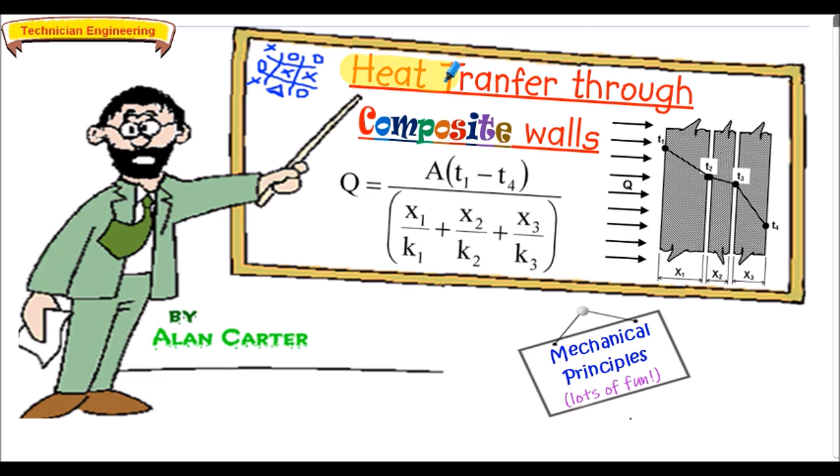Hello and welcome to this presentation related to heat transfer through composite walls. An illustration of a composite wall is shown on the right hand side here of thickness x1, x2 and x3.

In a previous presentation we calculated the heat transfer through a single wall. In this presentation we're going to calculate the heat transfer, symbol Q, using this formula shown here for the composite wall. It is strongly encouraged that you review the previous presentation on heat transfer through a single wall before reviewing this presentation related to heat transfer through composite walls.

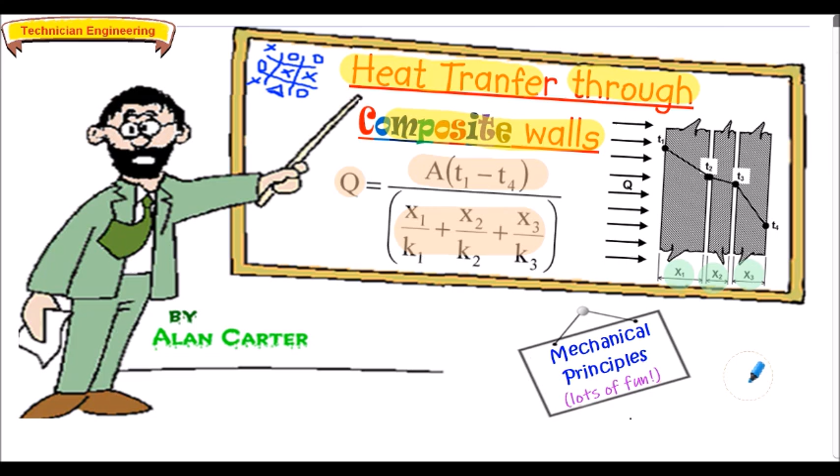Here's a presentation overview. We commence with an introduction outlining the formula used to calculate transfer of heat energy through composite walls. This is the formula shown here.

Then we have example 1b. This shows how to calculate heat transfer Q through a composite wall, having a range of temperature from T1 to T4, shown here on our sketch. And we also show how to calculate the intermediate temperatures, T2 and T3, within the wall, shown here on our sketch.

Next we have exercise 1b, which calculates the heat transfer Q and the intermediate temperatures T2 and T3 through our wall. Then we have some questions for you to undertake.

Question 1b calculates heat transfer Q, as does question 2b. And question 3b calculates the heat transfer per unit area. We use the symbol lowercase q to denote that property. And also how to calculate the thickness x2 of the composite wall.

Full work solutions are shown to the exercise and the questions. The presentation concludes with some further questions for you to attempt at your own pace.

And here are the approximate start times related to the various sections contained within the presentation, to hopefully aid your ease of access through the presentation, but please note these times are generally rounded to the nearest minute.

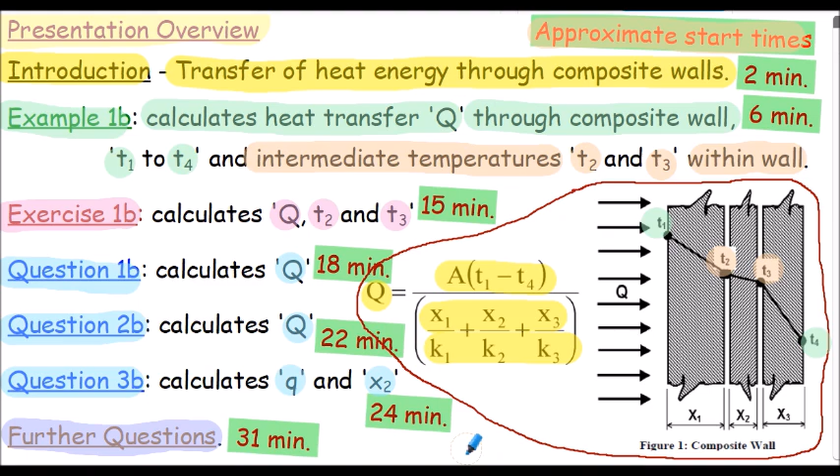So for equilibrium conditions, the transfer of heat energy through each section of a composite wall is assumed to be the same. So in other words, in our diagram, the heat transfer through section 1, Q1, would be the same value as the heat transfer through section 2, Q2, and the same value as the heat transfer through section 3, Q3. That's the assumption made in the calculations.

Thus, when considering the heat transfer through composite walls, shown in figure 1, the formula for Q is as stated below. The heat transfer Q is equal to the area of the wall multiplied by the difference in temperature between T1, shown here, and T4, shown here. And that's all divided by, in this bracket, thickness x1 divided by the thermal conductivity coefficient of material 1, labelled K1, added to x2 divided by K2, added to x3 divided by K3.

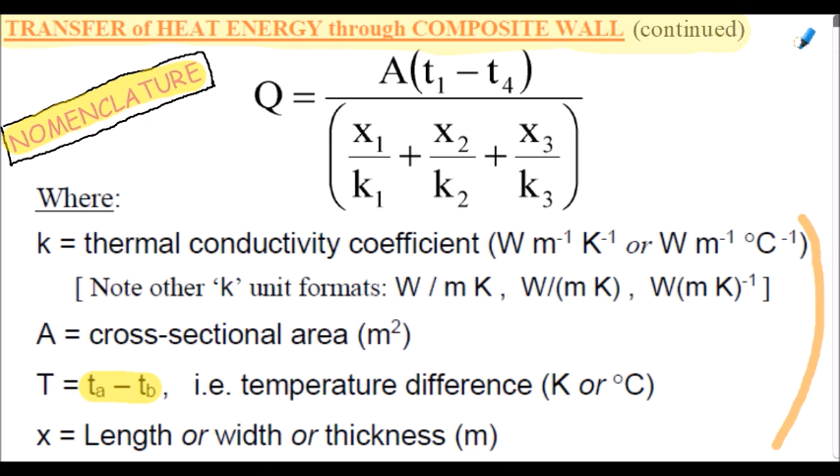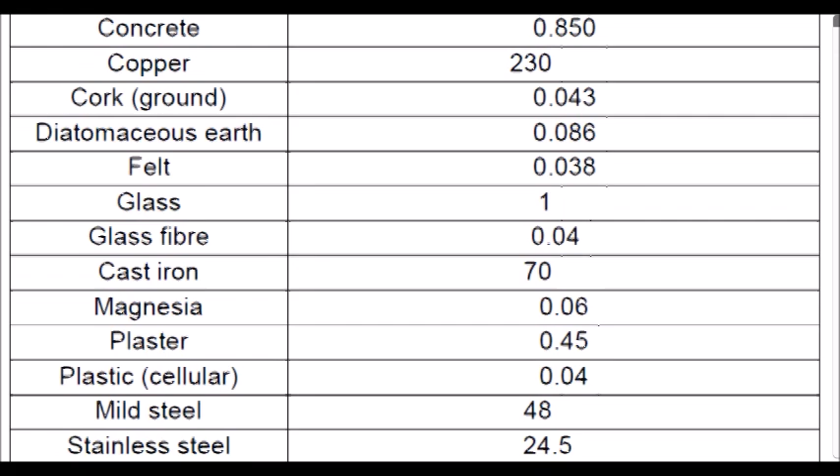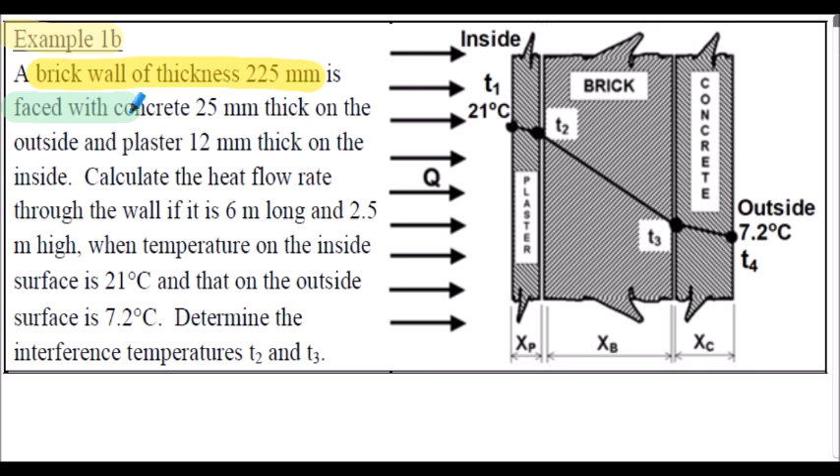Let's consider example 1b. A brick wall of thickness 225 millimeters is faced with concrete 25 millimeters thick on the outside and plaster 12 millimeters thick on the inside. Here's our brick wall of thickness XB, the concrete on the outside of thickness XC, and the plaster on the inside of thickness XP.

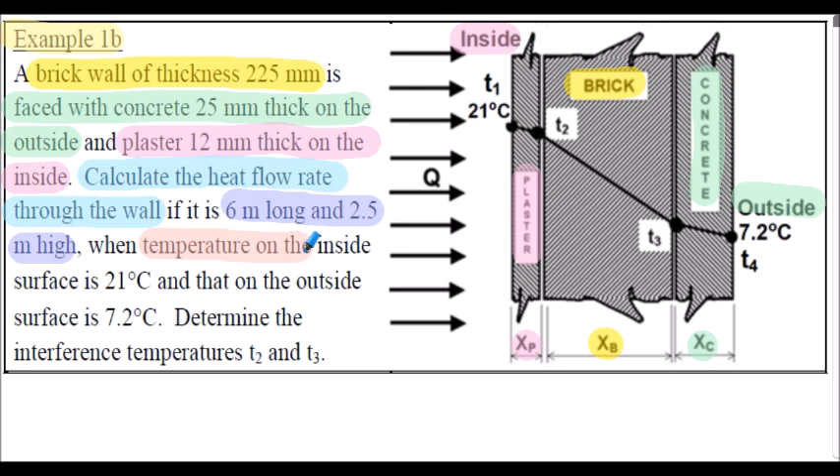We're asked to calculate the heat flow rate through the wall if it is 6 meters long and 2.5 meters high. The temperature on the inside surface is 21 degrees C, labelled T1. The temperature on the outside surface is 7.2 degrees C, labelled T4.

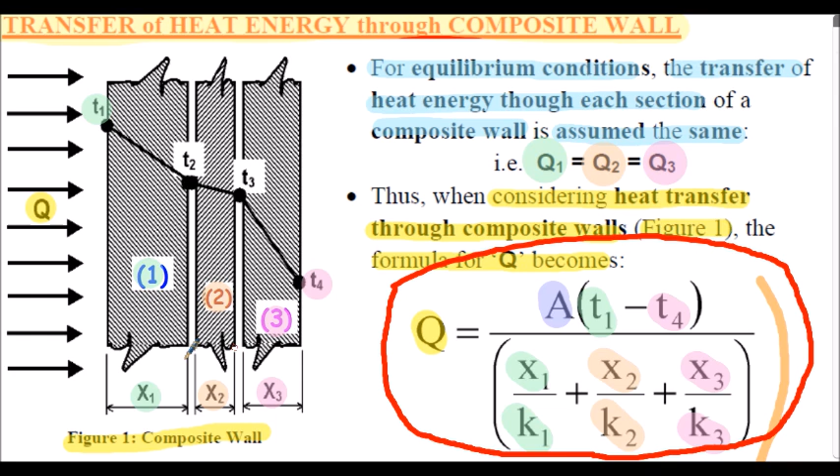We've got to determine the intermediate or interface temperatures T2 and T3. Initially we'll use this equation to calculate heat transfer Q for the 3-section wall as shown in the diagram, then rearrange this equation for the change in temperature, in this case T1 minus T2, to calculate the various intermediate temperatures on the wall.

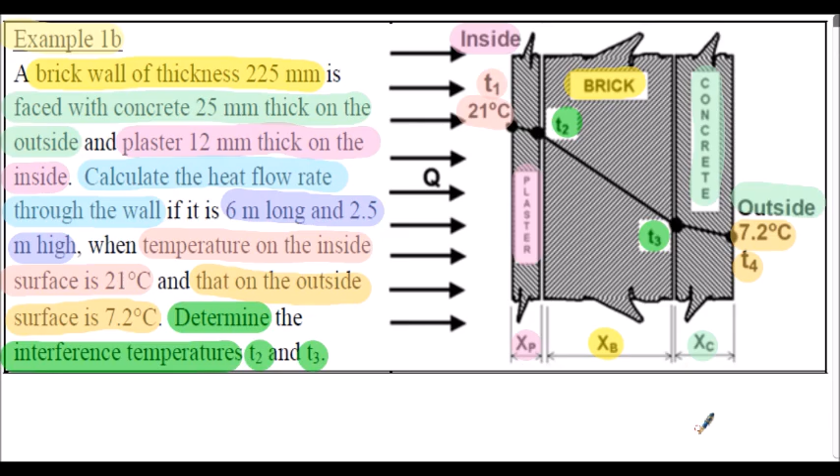I'll show you now the full worked solution for example 1b. Here's the beginning of the solution.

First, as always, we need to extract information from the question, and also from table 1 in our notes, shown on page 6, because we need to find the thermal coefficients for the plaster, the brick and the concrete.

Extracting information from the question: the thickness of the plaster XP is 12 millimeters, stated in meters as 0.012 meters since we'll use meters throughout. The thickness of the brick is 0.225 meters, and the thickness of the concrete is 0.025 meters.

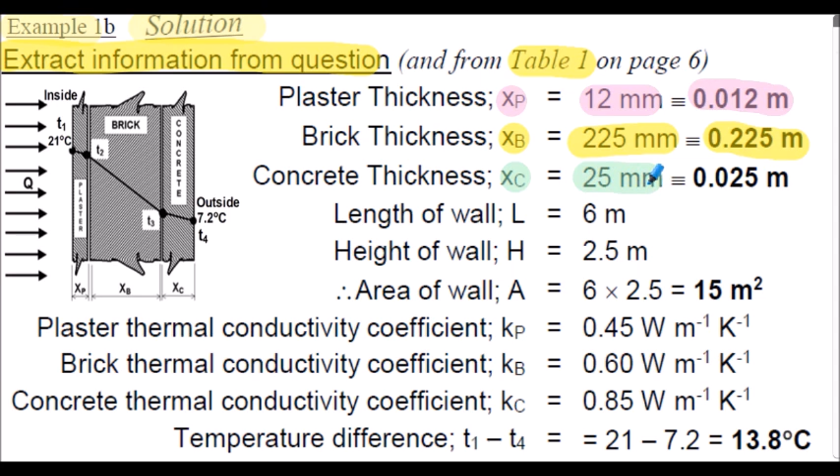In our diagram here, here's the plaster section XP, the brick section XB, and the concrete section XC. We're given the length and height of the wall in meters, so we can calculate the area of the wall, and it's 15 meters squared.

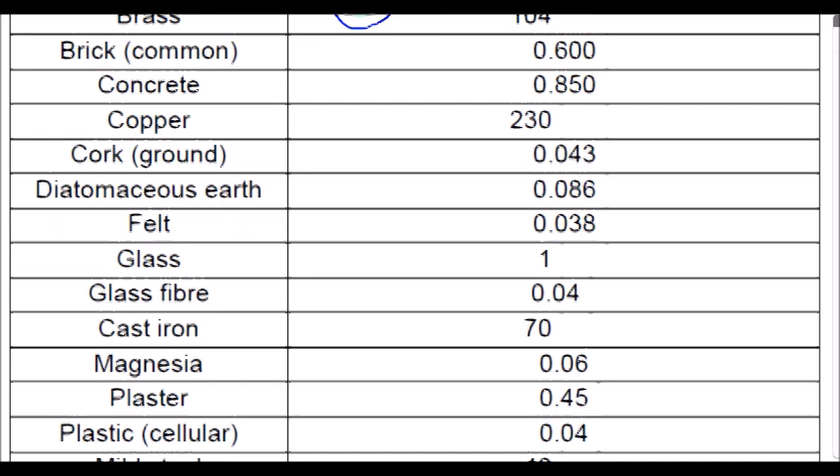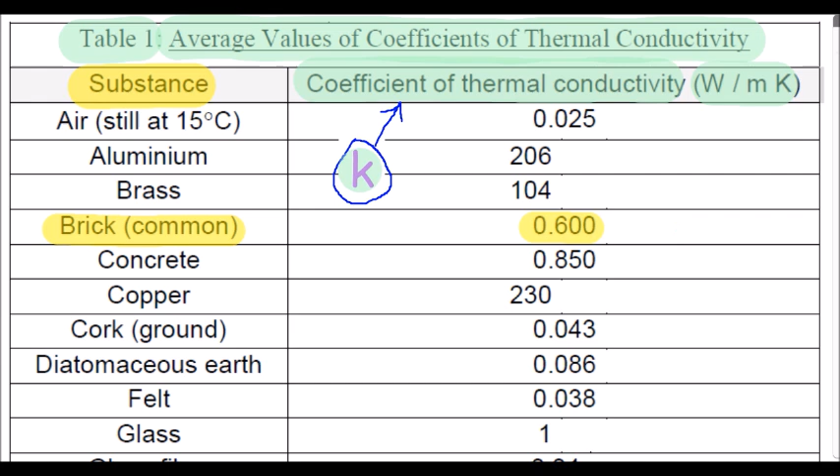Next we need the coefficient of thermal conductivity for the plaster Kp, that's 0.45 watts per meter per Kelvin, from table 1. The K for the brick is 0.6 watts per meter Kelvin, again from our table. And the K for the concrete is 0.85 watts per meter per Kelvin, shown in table 1.

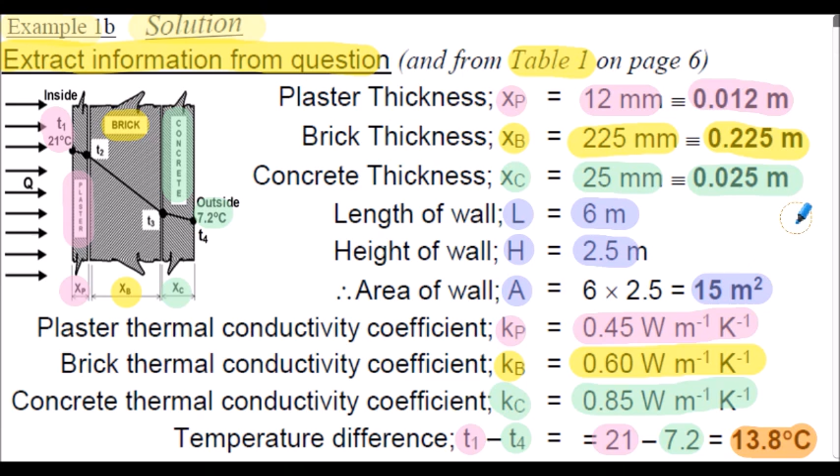The temperature difference is T1 minus T4. T1 is 21 degrees, the inside temperature, and T4 is 7.2 degrees C, the outside temperature. So our change in temperature is 13.8 degrees C. That's the information extracted from the question and from table 1.

Example 1b, solution continued. Firstly, let's calculate the rate of heat transfer, or heat flow rate Q, showing the formula on the left hand side. We're now just going to insert the various values, shown on the top right hand side of our slide for convenience, literally inserting them into the formula.

Our area is 15 meters squared. Temperature T1 minus T4 is 13.8 degrees C. XP upon KP, shown here. Next, XB divided by KB, shown here, inserted into our equation. And finally XC divided by KC, inserted into the equation. Evaluating, Q is 480 watts.

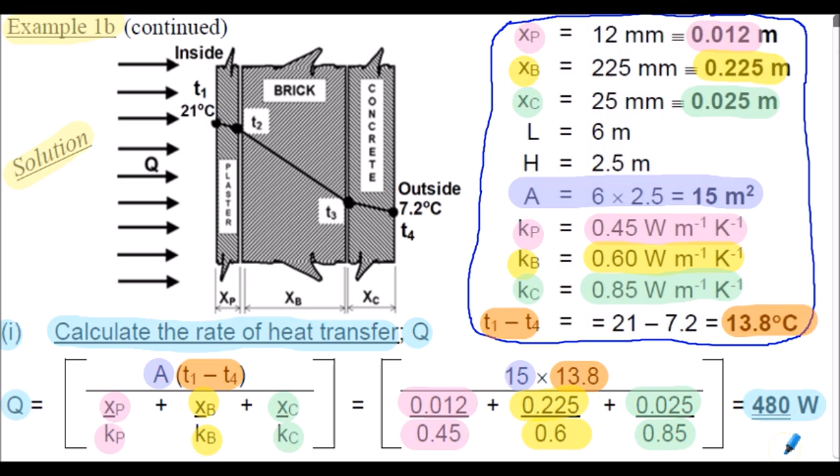We assume now that value of Q is constant throughout the three sections of the composite wall. That's the solution to the first part of example 1b.

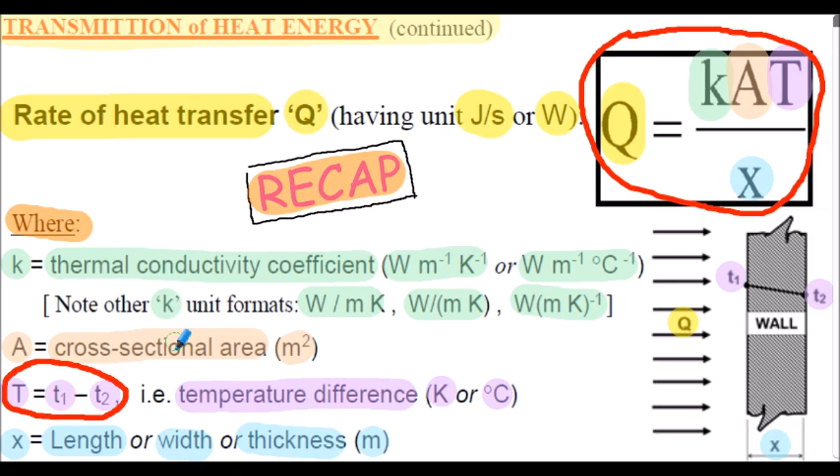Example 1b, solution continued. Now we need to determine the intermediate temperature T2 within our composite wall. This is part 2. To determine T2, we use the equation from the previous presentation for a single section wall: Q equals K A T divided by X, where T is the temperature difference. So Q equals K A capital T, which is T1 minus T2, all divided by XP.

We now need to transpose the equation for T2. First I divide both sides by KPA, then add T2 to both sides, and subtract QXP divided by KPA from both sides. So my transposed formula is T2 equals T1 minus Q multiplied by XP divided by KPA.

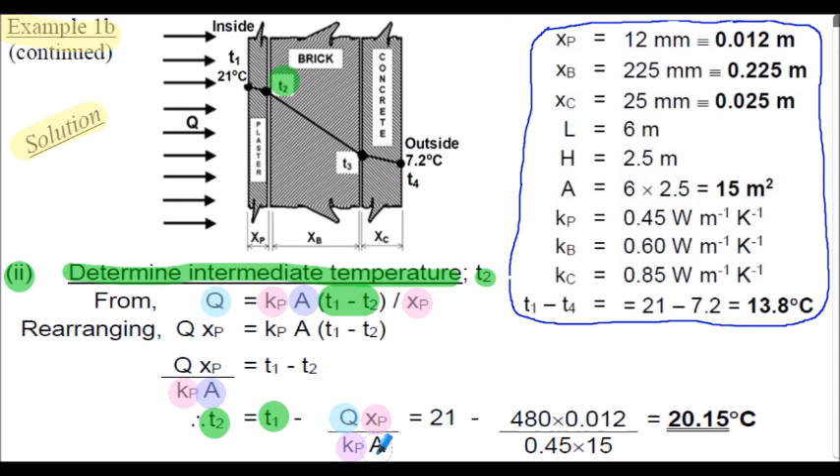All I'm going to do now is insert the values, listed above for convenience. Evaluating, T2 is 20.15 degrees C. We're now going to apply the same approach to calculate intermediate temperature T3.

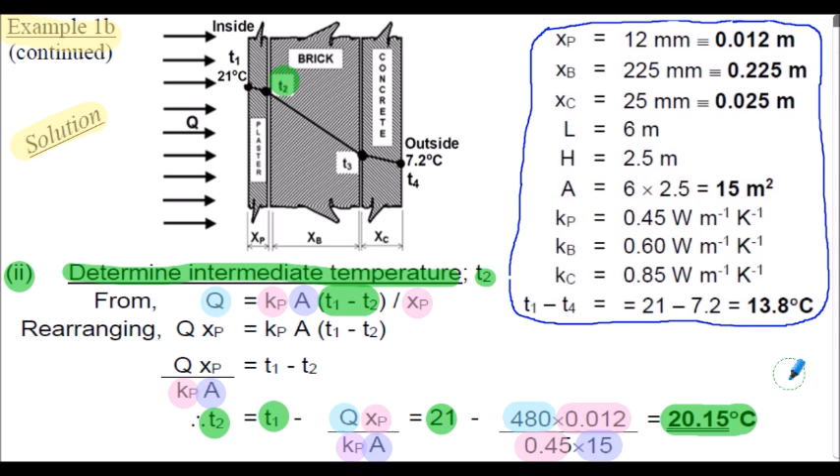Example 1b, solution continued. In part 3 we have to determine the intermediate temperature T3. It's a very similar approach to calculating T2. The only difference now in our heat transfer formula Q is that we use the K value for brick and the XB value for brick, since that's the section we're considering, and the temperature difference is now T2 minus T3.

Using the same transposition as before, we can evaluate the formula for T3: T2 minus Q multiplied by XB divided by KB multiplied by A. Inserting the values, the intermediate temperature T3 is 8.15 degrees C.

Example 1b, solution continued. I've included part 4 here for reference. I'm determining the outside temperature, T4. We know it's 7.2, but this is basically a check calculation on my previous calculations. I've taken the equation for Q, but this time with the change in temperature T3 minus T4, since I'm considering the concrete section, so my K and X values will be for concrete this time. Area remains the same, of course.

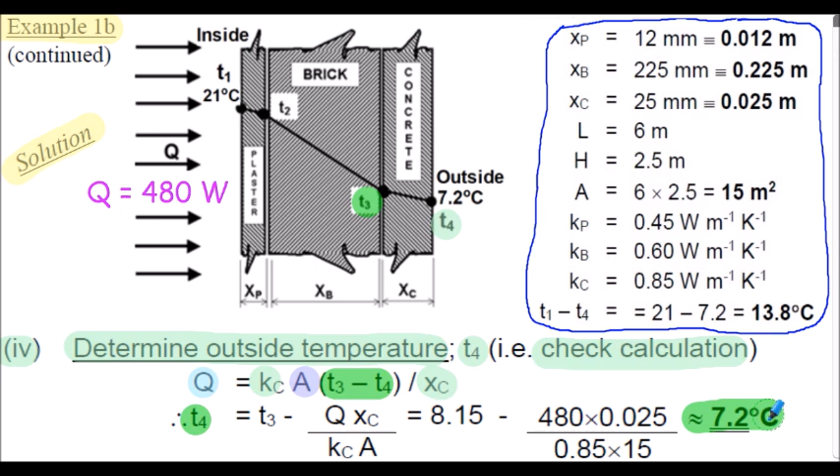I've transposed the above equation for T4 and inserted the values, and it works out to one decimal place to be 7.2 degrees C. So that was correct - just a check calculation added for reference.

Here's exercise 1b. The solution is very similar to that of example 1b. I'm going to very briefly outline the question. I will show you a solution, but I'll let you review the solution at your own pace.

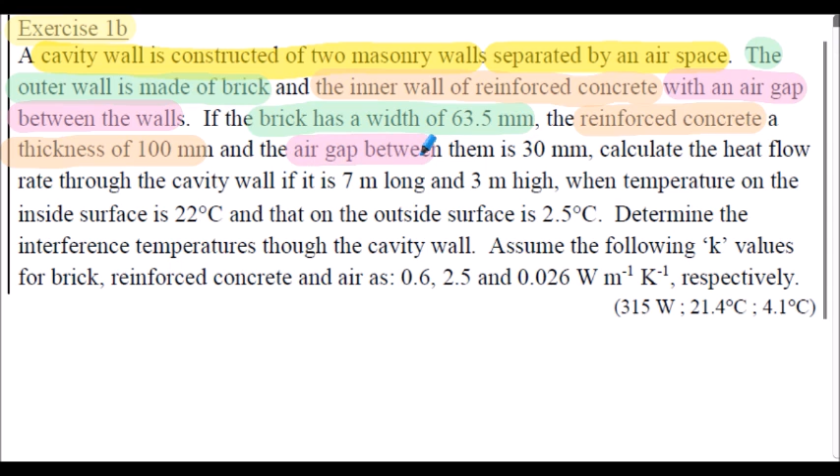A cavity wall is constructed of two masonry walls, this time separated by an airspace. The outer wall is made from brick, the inner wall is made from reinforced concrete, with an air gap between the walls. The brick has a width of 63.5 millimeters, the reinforced concrete a thickness of 100 millimeters, and the air gap between them is 30 millimeters. We've got to calculate the heat flow rate, Q, through the cavity wall if the wall is 7 meters long and 3 meters high.

We're given that the temperature of the inside surface of the reinforced concrete wall is 22 degrees C and the outer surface of the outside brick wall is 2.5 degrees C. We're asked to determine the interface or intermediate temperatures through the cavity wall, and we're given the K values for brick, reinforced concrete, and air in watts per meter per Kelvin. The answer for heat flow is shown here, and for the intermediate temperatures T2 and T3 shown here.

I'd encourage you to stop the presentation and attempt exercise 1B. It's a very similar solution to that of example 1B, so you can use example 1B as your template, but I will outline the full solution on the following slides.

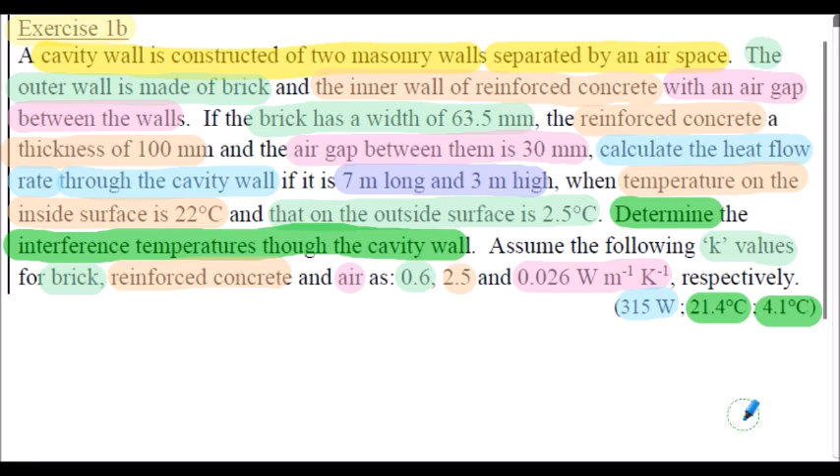So exercise 1B, commencement of the solution. As always, the first thing to do is to extract the information from the question. I'll let you review this slide at your own pace. Notice the temperature difference here, T1 minus T4, is 19.5 degrees C.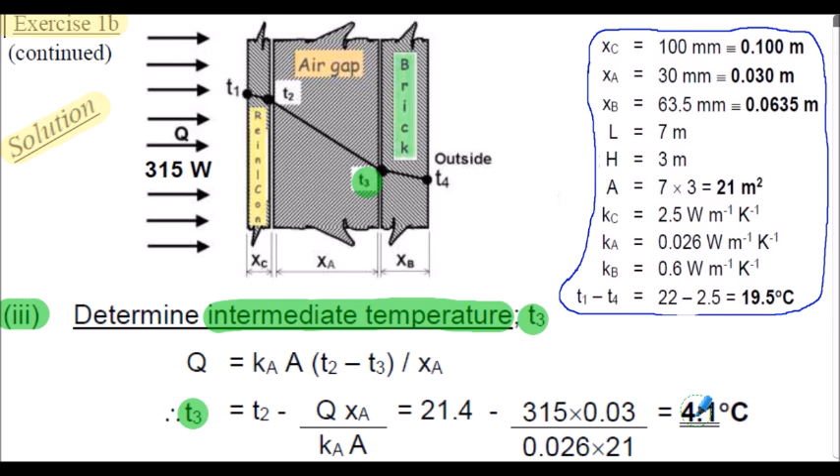Exercise 1B, solution continued. I have included a step 4, which again is a check. I'm calculating essentially the outside temperature T4. We know from the question it's 2.5 degrees C. So when I evaluate T4, it's approximately 2.5 degrees C. So I consider my calculations to be correct within the accuracy required for this type of problem.

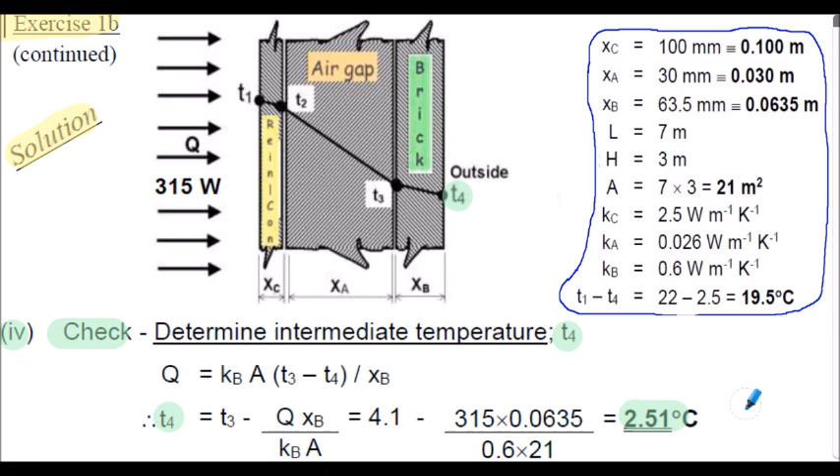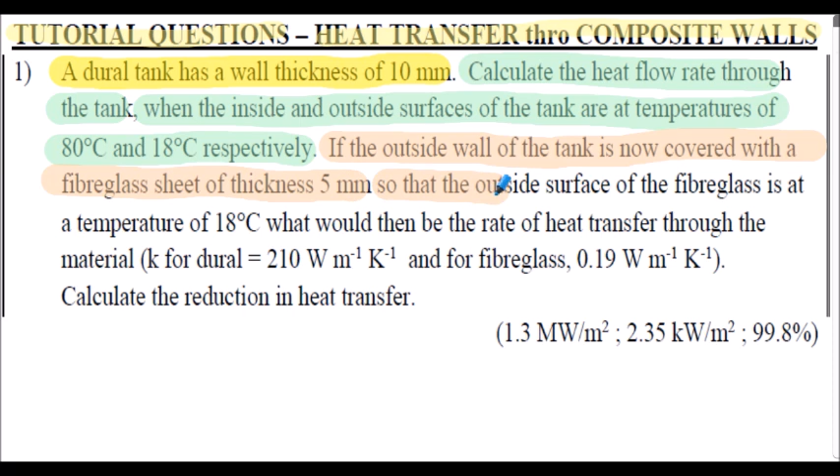Let's now consider some tutorial questions related to heat transfer through composite walls. Question 1: A Dural tank has a wall thickness of 10 millimeters. We're asked to calculate the heat flow rate through the tank when the inside and outside surfaces of the tank are at temperatures of 80 degrees C and 18 degrees C respectively. If the outside wall of the tank is now covered with a fiberglass sheet of thickness 5 millimeters, so that the outside surface of the fiberglass is at a temperature of 18 degrees C, what would then be the rate of heat transfer through the materials of the composite wall?

We're given the K value for Dural and for fiberglass. Finally, we've also got to calculate the reduction in heat transfer due to the addition of the fiberglass sheet to the Dural tank. Answers are shown in the bracket here. Just notice that the values of Q here are calculated in terms of unit area because question 1 does not actually state the geometry of the wall itself.

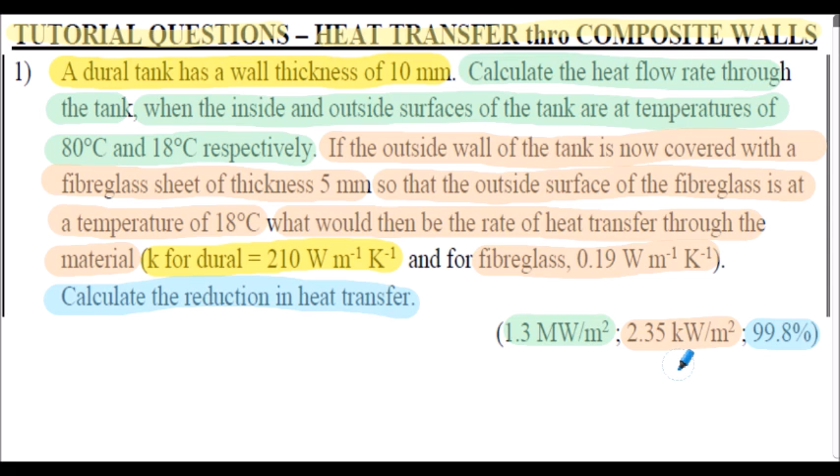If it helps, here's a sketch of the Dural and fiberglass composite wall.

I would now encourage you to pause the presentation and attempt question 1, although I'll briefly outline the full work solution on the following slides.

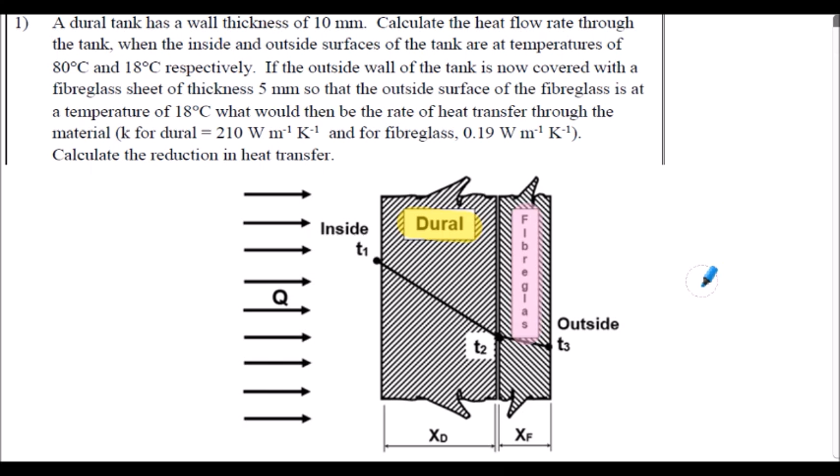There is question 1, commencement of the solution. On this slide I've simply extracted the information from the question, which I'll let you review at your own pace. As always, ensure your dimensions are in meters. I've calculated the temperature difference T here, which is the same in both parts of the question, denoted as T1 minus T3, and that would be 62 degrees C.

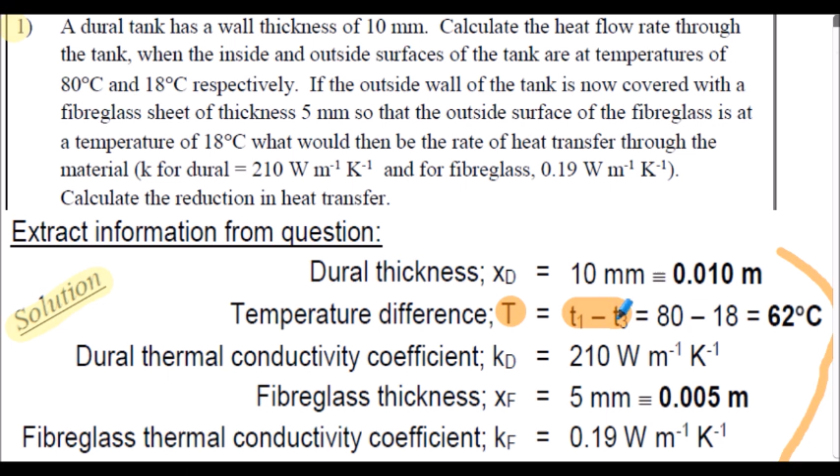Solution continued. For part 1, I've calculated the rate of heat transfer through the Dural tank per metre squared. This is when there's no insulation. I've labelled this lowercase q1 because we're calculating heat transfer per unit area. So q1 equals kT divided by x.

Inserting the values, it's 1.302 megawatts per metre squared. For part 2, we're now calculating the rate of heat transfer through the fiberglass insulated tank, labelled lowercase q2. This is now a composite wall, so we consider our temperature difference T1 to T3, which is actually the same in this case, still 62 degrees as stated in the question. But I've got to account now for both the Dural and the fiberglass in my calculation. Inserting the values, the rate of heat transfer is 2.352 kilowatts per metre squared.

Finally, we're asked to calculate the percentage change in heat transfer per metre squared. In my calculation here, that will be Q2 minus Q1, divided by Q1. Inserting the values from above, for the formula I've used here, the change in heat transfer is actually a negative value. That just means it's a reduction. So a 99.8% reduction in heat transfer by adding the fiberglass sheet to the outside of the Dural tank - a very substantial reduction by adding the insulation.

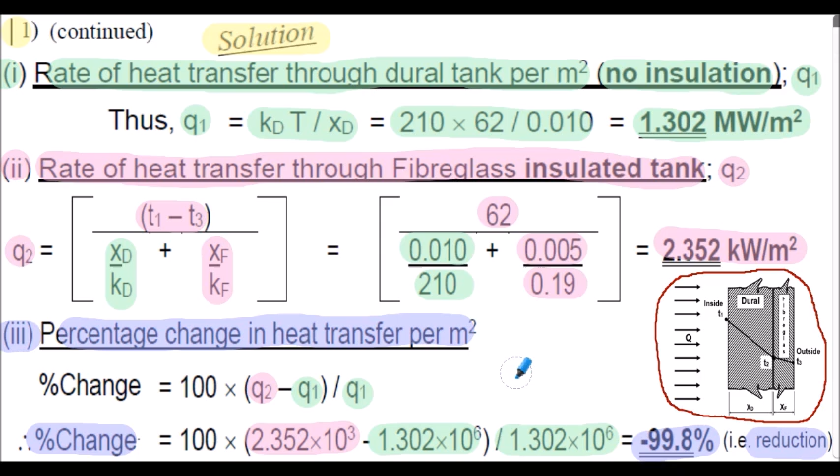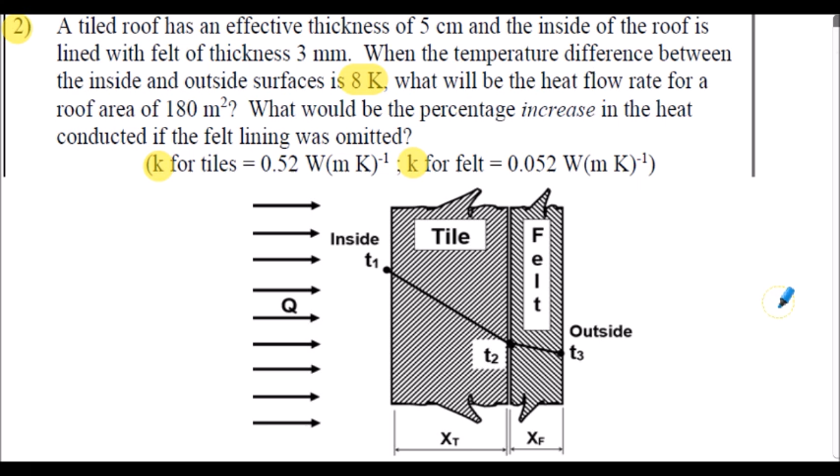Here's question 2. I'm going to let you review this at your own pace. It's a very similar solution to that of question 1. Just note the temperature difference is stated as 8K. Don't let that bother you - we know from our previous work that the increment between the Celsius scale and the absolute Kelvin scale are the same, so 8K is the same as 8 degrees C. Again, all the information is given in the question you need to solve the problem. I'd encourage you to stop the presentation and attempt question 2, but I'll outline the solution on the following slides.

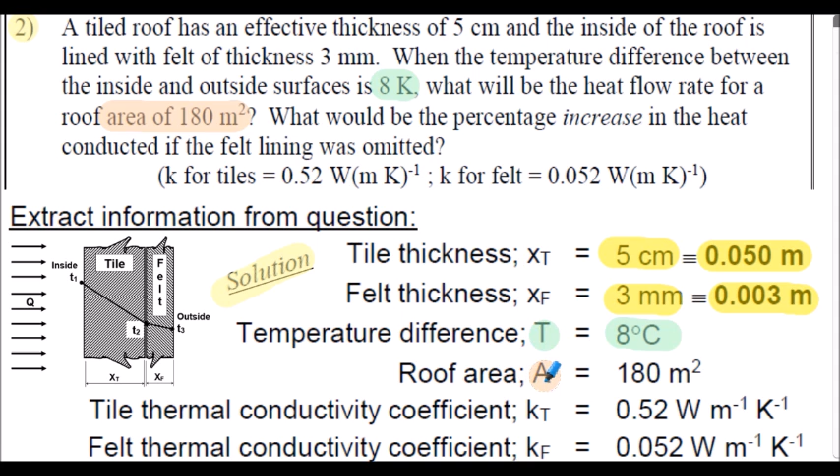Question 2, solution continued. The first part of the question calculated the heat transfer through the tiles that are insulated with felt. So Q for the tiles with felt is 9.36 kilowatts. Secondly, calculate the heat transfer through the tiles only, with no insulation. So Q for the tile is 14.98 kilowatts. Finally, calculate the increase in heat transfer assuming the felt was not used, and that calculated to be a 60% increase.

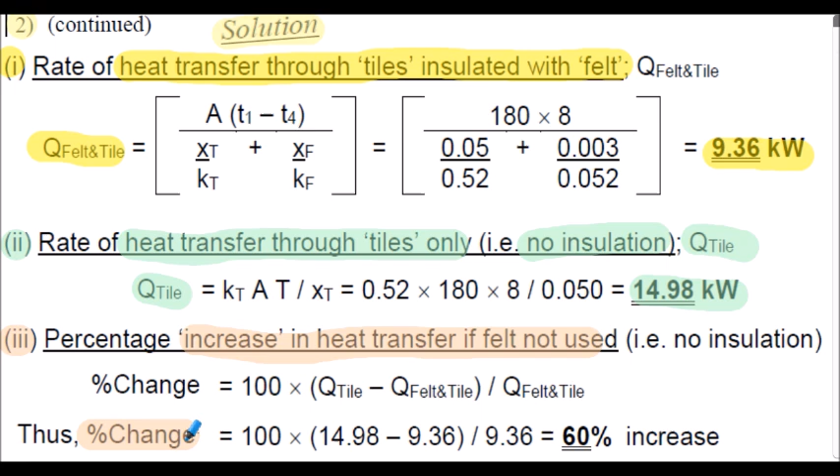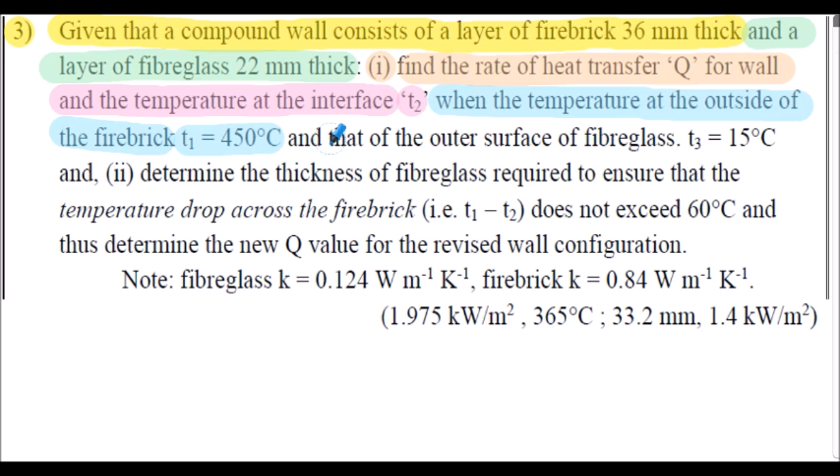Question 3. Given that a compound wall consists of a layer of fire brick 36mm thick and a layer of fiberglass 22mm thick, we've got to find: 1, the rate of heat transfer Q for the wall and the temperature of the interface T2, when the temperature of the outside surface of the fire brick T1 is 450 degrees C and that of the outside surface of the fiberglass T3 is 15 degrees C. And part 2, we've got to determine the thickness of the fiberglass required to ensure that the temperature drop across the fire brick, T1 minus T2, does not exceed 60 degrees C, and thus determine the new Q value for the revised wall configuration. We're given the K value for fiberglass and fire brick in the question.

The answers are shown in the bracket here. For part 1, the heat transfer rate Q, notice it's shown in terms of heat transfer per unit area because no area is actually given in the question. Here's temperature T2 for part 1. And for part 2, the fiberglass thickness is stated here and the revised value of heat transfer Q stated here.

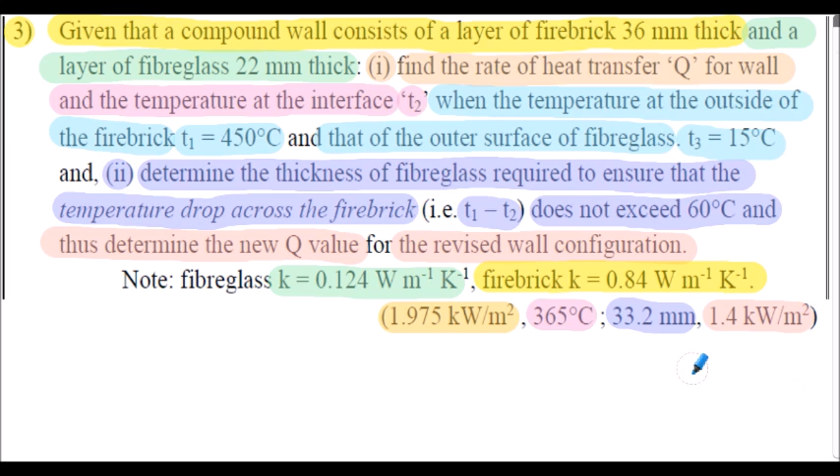Part 1 of the question is very similar to that we've encountered in previous solutions of this presentation, but for part 2 we use the assumption that the heat flow rate per unit area through the brick is the same as the heat flow rate per unit area through the fiberglass. So we essentially equate these two equations shown here for the brick and the fiberglass, and we'll need to rearrange the equation to find the value of XF, the thickness of the fiberglass required for the conditions stated in the question.

I'd now encourage you to attempt question 3. Certainly the first part of the question you've encountered before, but as I said, the second part may need some further consideration. I will outline the full solution to question 3 on the following slides.

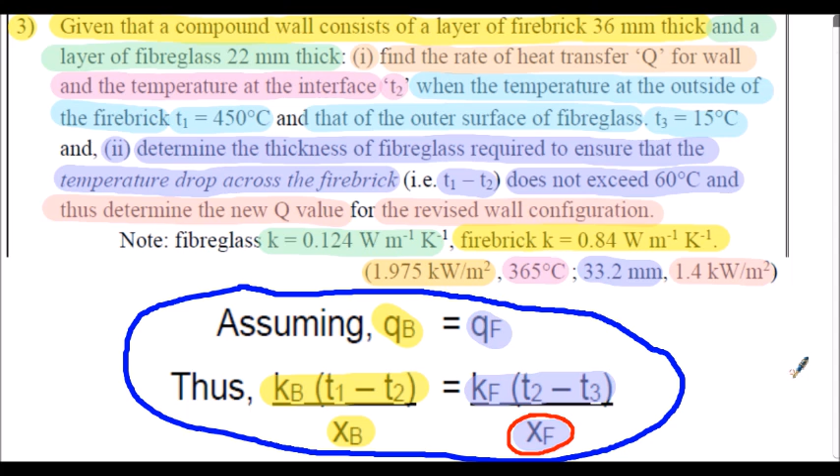Question 3, here's the commencement of the solution. On the left hand side I've drawn a small sketch, a compound wall showing the brick and the fiberglass. As always, I'm extracting the information from the question here.

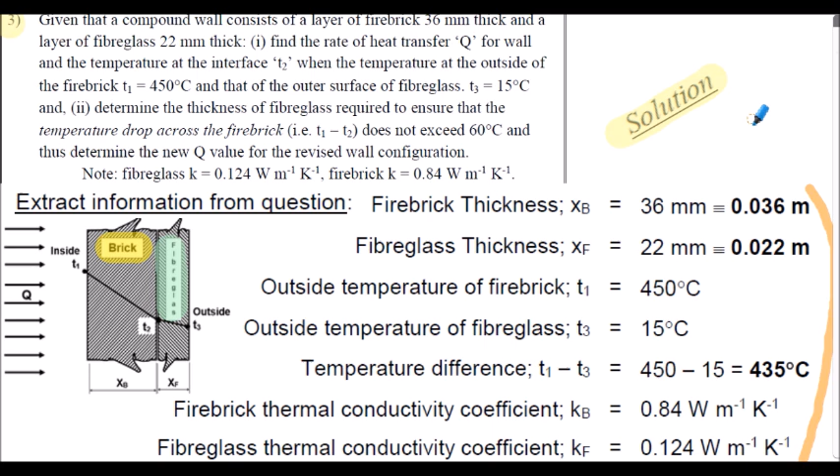Question 3, solution continued. Firstly, I've calculated the rate of heat transfer through our fire brick and fiberglass per unit area, because no area was actually stated in the question. So calculating lowercase q here, this is the value in watts per meter squared.

Next I've determined the intermediate temperature T2 on our diagram. Not very clear to see, but it's this temperature here. Again, same approach as before, commencing with our equation for heat transfer per unit area. I've rearranged the equation for T2, so intermediate temperature T2 is calculated here.

I did undertake a check here, this is just for reference really. Instead of using T1 and T2 as my temperature difference, I've now used T2 and T3 given the parameters in the question, and of course that works out to be exactly the same temperature for T2. So I can now calculate the temperature drop across the fire brick, and in this case that's T1 minus T2, which evaluates to approximately 85 degrees C.

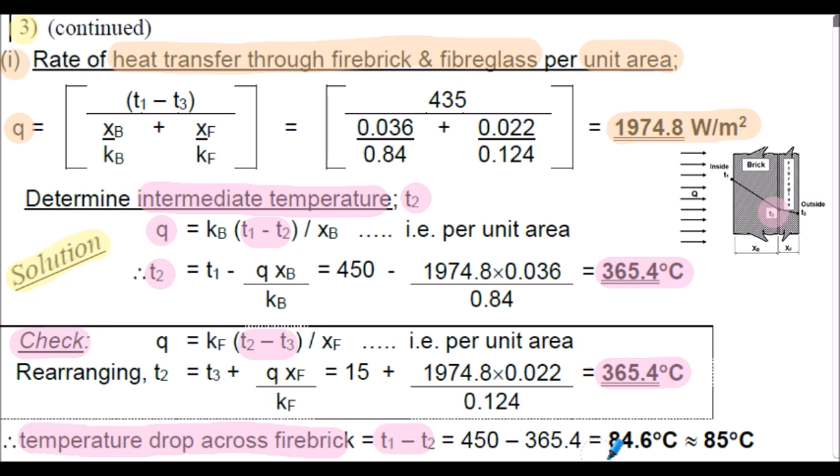So we can now calculate T2, the intermediate temperature, because we know the inside temperature is still 450 degrees C, that's our T1, and the temperature difference across the brick must be limited to a maximum of 60 degrees C. So that means we can evaluate T2, which is 390 degrees C.

Now using the assumption that qB is equal to qF, that's the underpinning assumption we've used throughout the presentation. So we can now use the formula for a single section wall, the generic KAT upon X. In this case we ignore the A because we're calculating heat transfer per unit area. So we can write that equation in terms of the brick, and the change in temperature across the brick is T1 minus T2, and that equals the formula for the fiberglass, but of course the change in temperature there is T2 minus T3.

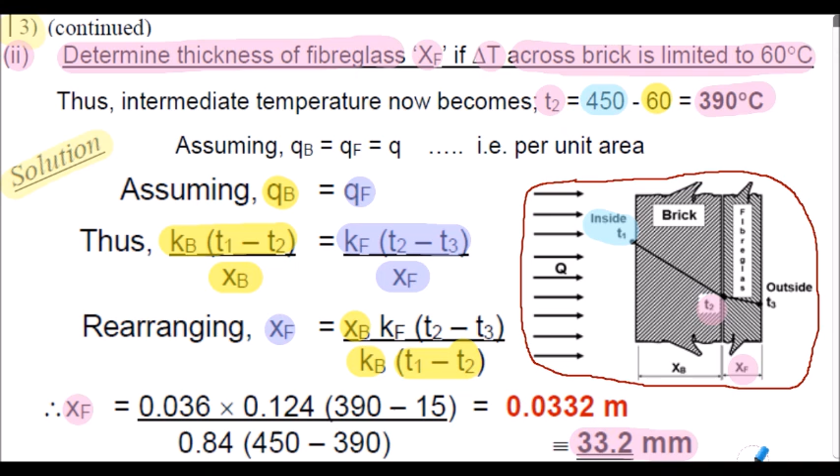Finally, question 3, solution continued. We're required to calculate the heat transfer rate through the new fire brick thickness and the fiberglass configuration. So lowercase q here is calculated, but using the thickness of XF we found on the previous slide. The value of Q is 1400.5 watts per meter squared.

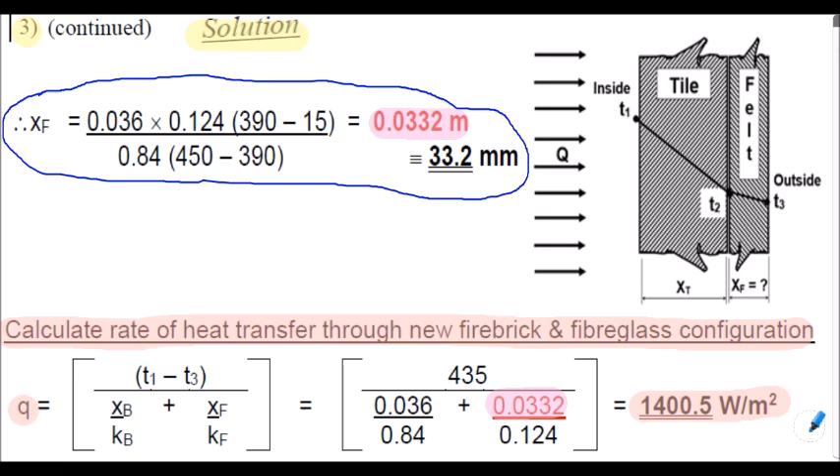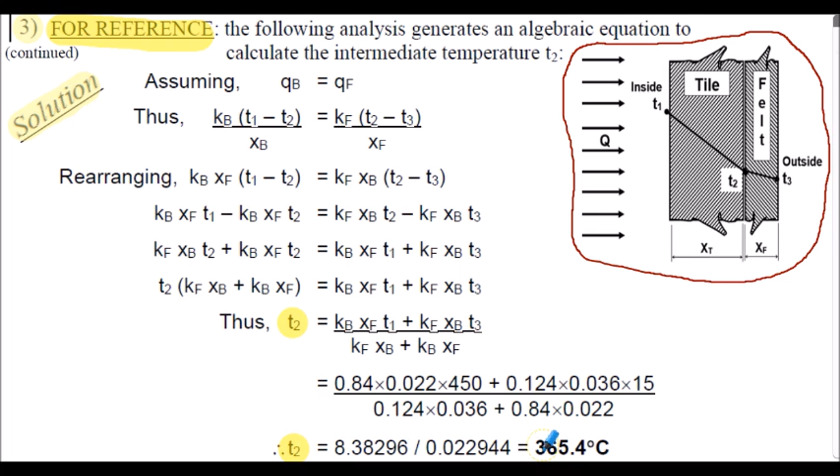Question 3, solution continued. This is purely for reference, so I'm going to leave this for anybody that is interested. It's just another way of calculating the value of T2 by manipulating the equation algebraically. It obviously compares to exactly the same value we calculated in our previous solution.